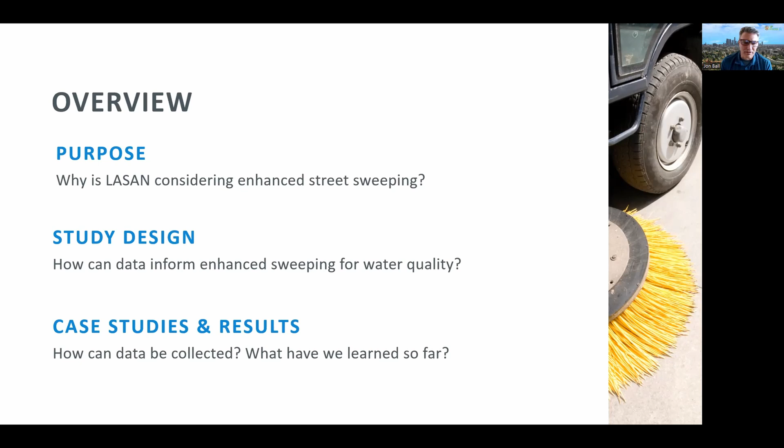Ryan will also talk about other case studies and some specific results that we've gotten from our first phase of testing that we've completed, and kind of where we're going to go from there. Next slide. Okay, just a little more background on the City of Los Angeles and specifically the Bureau of Sanitation. So I work for LA Sanitation, and sanitation is primarily focused on wastewater treatment, watershed protection, which is the group that I work in, which is stormwater management, and then also managing our solid resources or our trash.

There's also a lot of other work that's done with sustainability. We have a really neat biodiversity program and have a lot of really talented engineers and scientists within our organization. The one thing you don't see on this slide is a street sweeper. Actually, sanitation is not responsible for the street sweeping program in Los Angeles.

Let's see. So the main mission of LA Sanitation is to protect public health and the environment. And the division that I work in is primarily focused on stormwater quality and how that impacts environmental health and public health. Los Angeles is a pretty big city. It covers a large geographical area. There's 4 million residents. Sanitation is a big organization in itself; we have 25 separate divisions. They kind of fall under those main categories of wastewater, stormwater, and solid resources. We have over 3,000 employees.

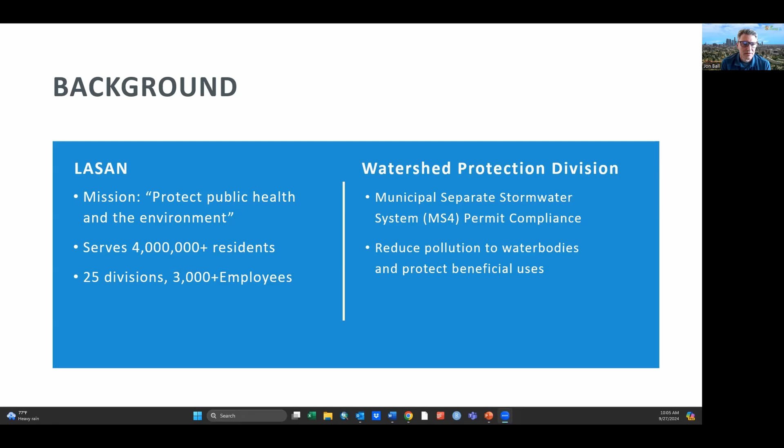And the group that I work in, Watershed Protection, we are mainly focused on compliance with our MS4 stormwater permit. And we're looking at ways to reduce pollution to our local water bodies and protecting our beneficial uses. So if sanitation doesn't oversee street sweeping, why are we interested in that? Well, we have some challenges in terms of water quality. That's going to be inherent when you have 4 million people living in a region.

And we'll get into some more specifics on this, but there's a lot of efforts that are going on to improve water quality. A lot of it has been focused on infrastructure projects that capture and treat stormwater. But those can be pretty expensive, as other presenters were discussing in the previous seminar. So we see street sweeping as an opportunity. We can get at pollutants before they enter our MS4 system. And I've been told, and I believe this, that it's a cost-effective alternative to structural BMPs.

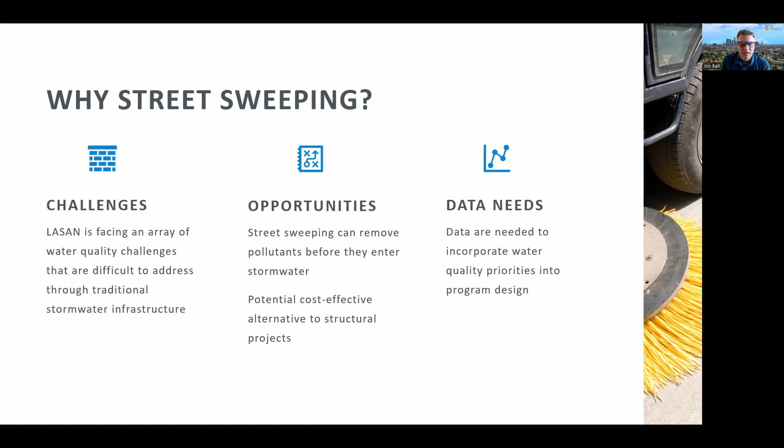So in order to maximize the benefits of street sweeping in terms of water quality, we've realized we need to collect some data on this and kind of test for ourselves in our local area. How can we make improvements to our existing street sweeping program? And that's what we're going to talk about today. So here's a listing of some of the water quality challenges that we have in the City of Los Angeles. And actually, these are not just specific to the City of LA. There's many other municipalities that are represented in this map.

This shows about four of the major watersheds that the city of Los Angeles is located in. The one in pink is the Los Angeles River, our largest watershed. The one in blue is Ballona Creek. The one in yellow is the Dominguez Channel, which drains to the LA Harbor. And green represents the local creeks and storm drains that discharge to Santa Monica Bay.

So we have TMDLs established in all of these watersheds. Bacteria is ubiquitous throughout. Metals, including copper, lead, and zinc, are included in all of these. Santa Monica Bay might be an exception, but we do detect metals in the runoff to Santa Monica Bay. Trash is a problem region-wide, and there's a trash TMDL in place. We also have legacy organics like PCBs and DDTs, and even though those haven't been used for decades, we still detect these compounds in our runoff samples.

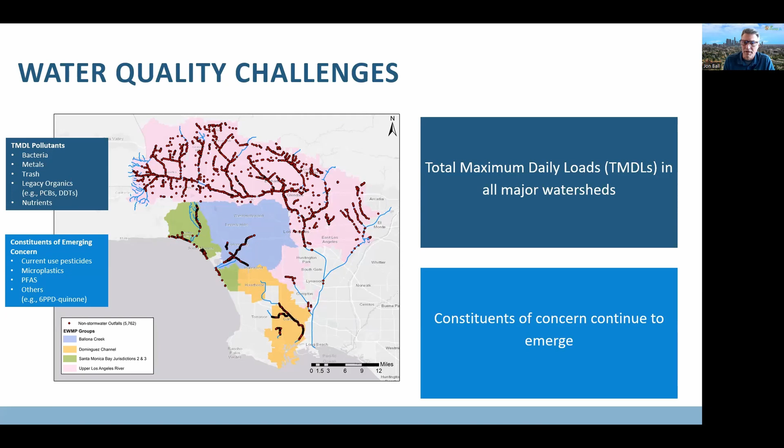So we do have these watershed management programs that are in place. These were incentivized by our MS4 permit. For each watershed that I just showed you, we have a watershed management program. Basically, these are a roadmap for how we can attain the water quality requirements that are required of us. And the end goal is to protect those beneficial uses, such as recreation and freshwater and saltwater habitat.

So how do these watershed management programs work? Well, they determine how much stormwater must be captured and treated - so how much capacity or volume of stormwater needs to be treated. It identifies the BMPs and the locations where they're needed. There's an optimization algorithm that's run through modeling, and it finds the most cost-effective BMPs. In the end, it provides basically a recipe or a list of BMPs that are needed.

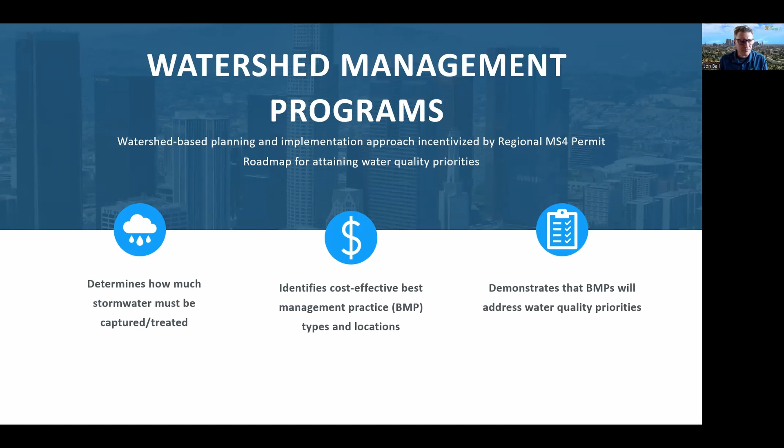Part of this program is also demonstrating to our Regional Water Quality Control Board that this recipe of BMPs will indeed result in the water quality that needs to be attained. That's also referred to as a reasonable assurance analysis, or RAA.

Okay, so we have some challenges with these watershed management programs. They're significant, and they provided a roadmap. So now we have this roadmap, but there's a lot of hurdles to get over. One of the biggest hurdles is just the capacity needed to treat all this stormwater runoff. So we like the Dodgers here in LA - this graph shows basically the treatment capacity that's needed in each of our major watersheds. We've termed it in terms of Dodger stadiums - how many Dodger stadiums would you have to fill up to treat the necessary amount of stormwater runoff?

You can see Upper LA River, we have nearly 6 Dodger stadiums to fill up with stormwater runoff. So every time it rains, imagine filling up 6 stadiums of water. That's what we're up against. If you take all of the watersheds, that's about 11 stadiums worth of water treatment, and that's just an enormous volume to deal with. So that is definitely one of the biggest challenges, to the point where we wonder if it's possible.

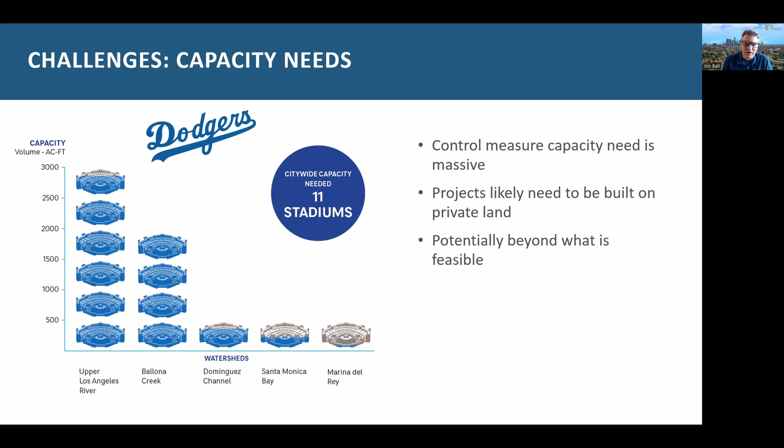Another challenge would be just the cost associated with that. We've made some headway on this, but basically the pie chart on the left shows the total funding that would be needed over a 10-year period is up to about $6.5 billion with a B. And you contrast that with the revenues available to us, which is on the right-hand side - we're looking at $1 billion over a 10-year period.

Now, in our region, in LA County, we just have this new stormwater fee that was passed - it's the Safe Clean Water Program, Measure W, you may have heard of it. That generates a lot of money for us, but you can see we're still only about one-sixth of the way there. So there's a lot of cost associated with meeting water quality.

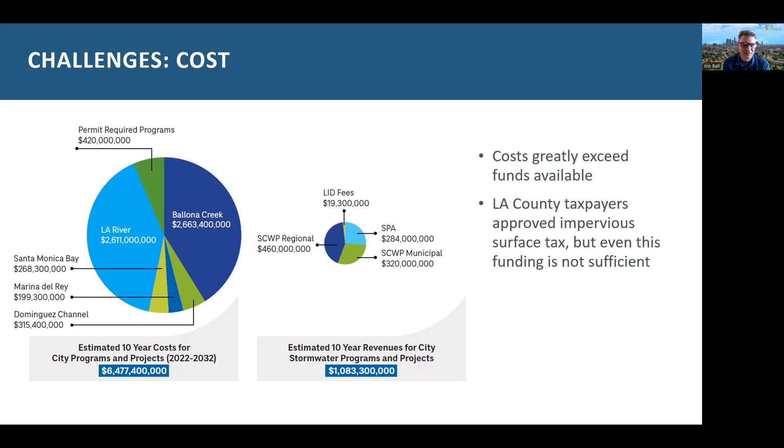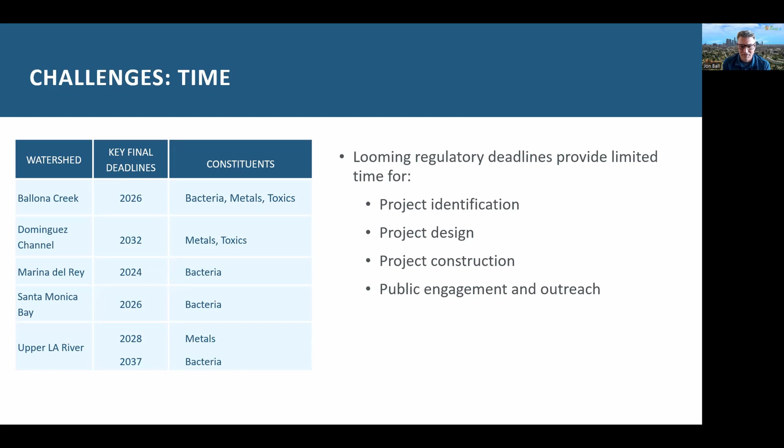Other watersheds are on different schedules, but there really isn't enough time to implement the number of projects. We don't have available funding. So you can see that we definitely have our challenges, and I think that's kind of why we're looking to other solutions to augment the efforts that we're doing right now.

So that is why we're looking at street sweeping. How can street sweeping improve water quality?

We know that the material on streets, also known as street dirt, does contain a variety of pollutants. Some of this comes from vehicle emissions and wear products. I've learned over the years that tires have a lot of zinc in them, and brake pads, at least traditionally, have had copper in them. In California, there's a brake pad initiative that was passed, so we are reformulating our brake pads in California. I'm not sure what the rest of the country is doing about that. We're hoping that will be effective, but regardless, we know that there's just a lot of pollutants that end up on the streets.

Even the street material itself, the roadbed material, contains heavy metals and PAHs. And then, as people fertilize their lawns or parks, use pesticides, there's pet waste that ends up on the streets. In the end, street dirt contains all this stuff. And we know that if we can control street dirt better, then we can improve water quality.

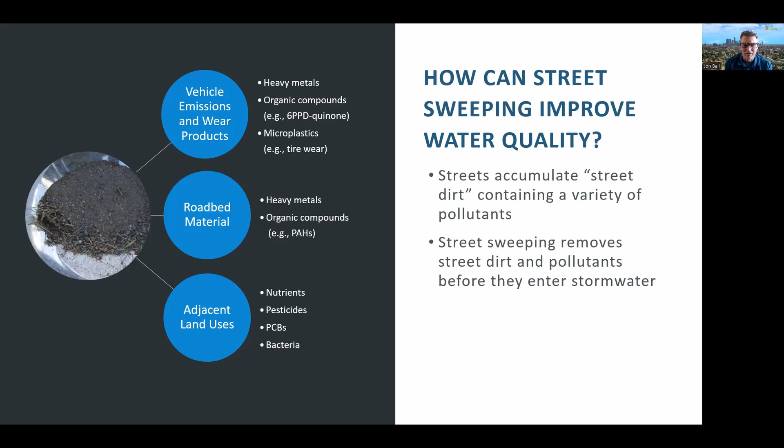This was discussed a lot in the previous presentations, and I'm still learning about street sweeping, I'll be the first to admit that. But some of the things I've learned already is that there's a lot of advantages to using street sweeping as a way of controlling pollution.

One of the major things is that it's highly cost effective relative to traditional structural stormwater BMPs. And I've seen this firsthand because City of LA has put in a lot of stormwater projects, and operation and maintenance in particular has always been a challenge. I know street sweeping also has requirements for operating and maintaining the fleets, but I feel like we already have a pretty good handle on that.

Structural BMPs also take a long time to get in the ground. There's a lot of permitting, there's the design process, the construction. You always run into things you didn't anticipate with a large structural BMP project.

Street sweeping also just makes your city look cleaner, and that's one of the main reasons it's done in the city of Los Angeles. What we're trying to get across to people in our own organization is that street sweeping can also be a really effective way of removing pollutants. So those are the advantages.

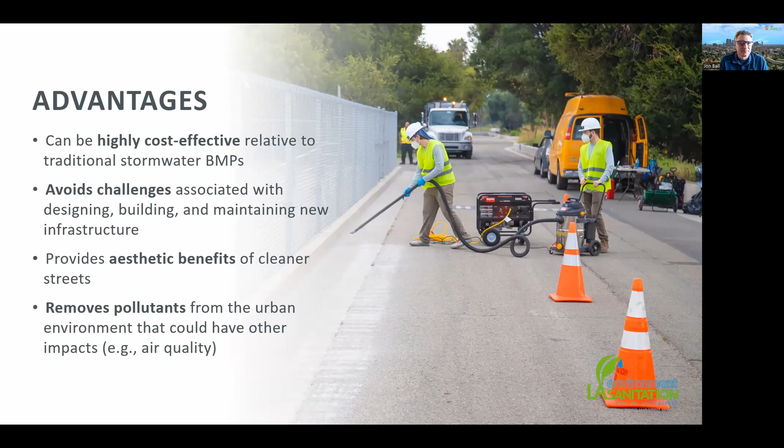So how do we currently sweep? Street sweeping is a requirement of our MS4 permit. Like I mentioned, LA Sanitation is not involved directly in street sweeping, it's covered by our Bureau of Street Services, and there's over 4,700 curb miles that are swept biweekly. I would say that the primary focus is really on the stuff that you can see, the trash and debris that we can see with the eye.

But what is less obvious is the street dirt, and you don't always think of it in these terms, but street dirt is probably where most of the stormwater pollutants are associated with, and those are really what we need to focus on if we're going to think about improving water quality.

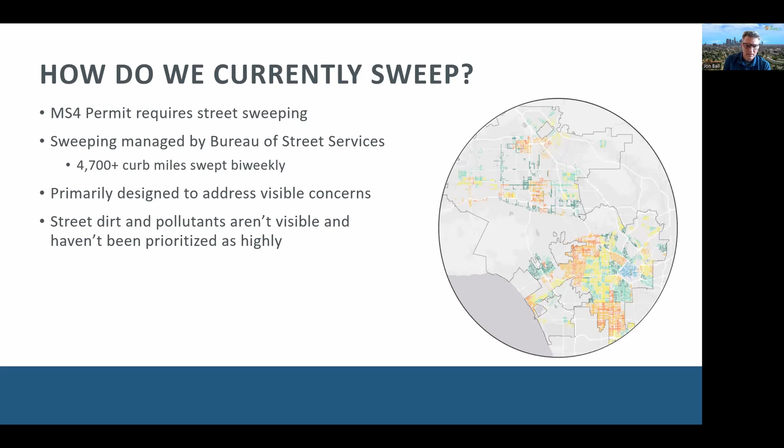That gets into our study, and there's three main things that we're asking. How should we be sweeping? That includes what are the best technologies and approaches to street sweeping. Ryan will talk about some of the comparison testing that we did with the broom sweepers and the regenerative air sweepers.

The other thing we're looking at in our study is where street dirt accumulates - where should we be sweeping and putting most of our effort in? And then, of course, when should we sweep? What are the critical times of the year? Should we put more effort before the storm season? And how frequently should we be sweeping in these areas? That's what our study is examining. And with that, I'm going to hand it over to Ryan.

Thanks, John. That was a great overview of some of the challenges that the city is facing. We provide a lot of support to the city on all those different TMDLs that John was mentioning at LWA. And we also have some experience doing street sweeping studies for other municipalities in Southern California. So when John came to us with interest in this topic, we were happy to support.

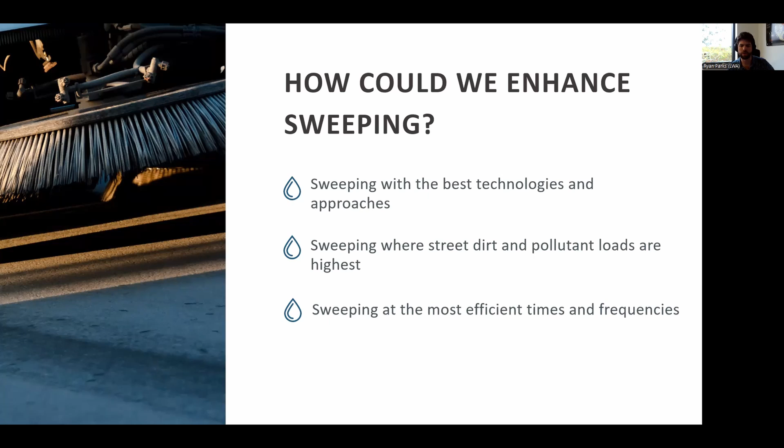I'm going to talk a little more about what the study looks like, what we've drawn up, what we've started to collect in terms of data. As John summarized, we've designed our study around three questions, with the aim of informing specific outcomes or areas where enhancement could occur. So telling us how we could sweep more effectively, which sweeper should we be using and procuring, how should we be operating the sweepers in terms of speed, and where to sweep, so understanding how pollutants are accumulating throughout the city.

The city, as John mentioned, is very large. There's a lot of differences in the topography, land use, both current and historic. So all of that is potentially driving where you could get the most bang for your buck in terms of, if we're going to enhance sweeping, maybe we should target these areas first. Then there's when to sweep, like John mentioned, really looking at sweeping frequency. Where do you start getting diminishing returns? And then also the seasonality - we have a Mediterranean climate here, so looking at sweeping during the wet season versus that period right before the wet season, right around now. How can we potentially use sweeping around some of those factors to yield the greatest benefit with our limited resources?

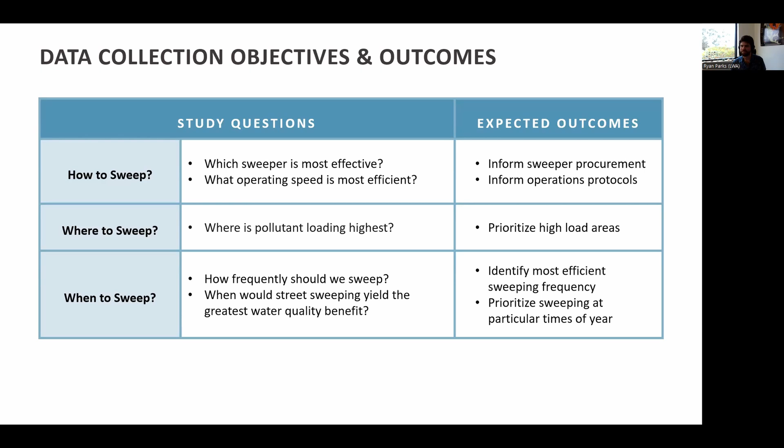So where was I? Basically, how is LASAN answering those questions? We're going to talk about three different types of monitoring, and if you were on that presentation earlier, these are the same terms that Roger was using. Some of this stuff is complete, some of this stuff is planned. First, what we've done so far is controlled environment pickup performance monitoring - evaluating sweepers in controlled conditions where you can isolate variables and really get at those differences between the sweepers and their different operating conditions.

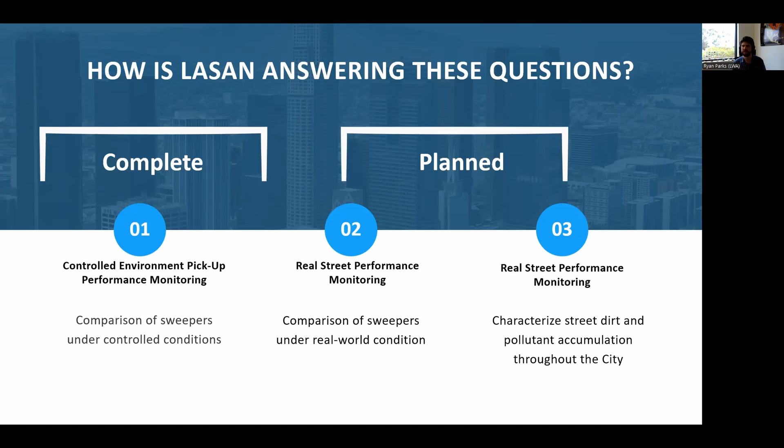It's the impervious surface tax funded stormwater funding, the vehicle that LA has developed in the last 5 to 10 years.

I'm also going to talk about another study that we did that LWA was a part of for the cities of Burbank and Glendale. Roger, who presented previously, also worked with us on this project and was a big help in implementing it.

I'm bringing it up to provide another set of data, particularly in some of the areas where we haven't collected data yet, as an example of the kind of data we will be collecting and some of the results that come out of that.

This was a study done in 2012 as part of a TMDL implementation plan that was really looking at, one, trying to understand the benefits of those two cities' current street sweeping programs in terms of pollutant removal, specifically metals, doing some controlled environment testing of potential new sweepers to see what they could achieve, and then going out and actually piloting those sweepers on real streets within those two cities to see what benefit they could get and how that could fit into their overall compliance strategy for the metals TMDL they were dealing with.

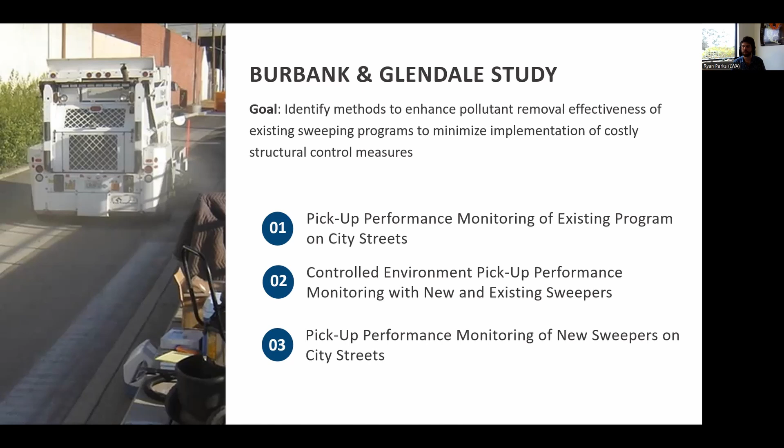So now I'm going to get into what this kind of monitoring looks like - what kind of data can you generate, and what are some things we're learning by collecting that data?

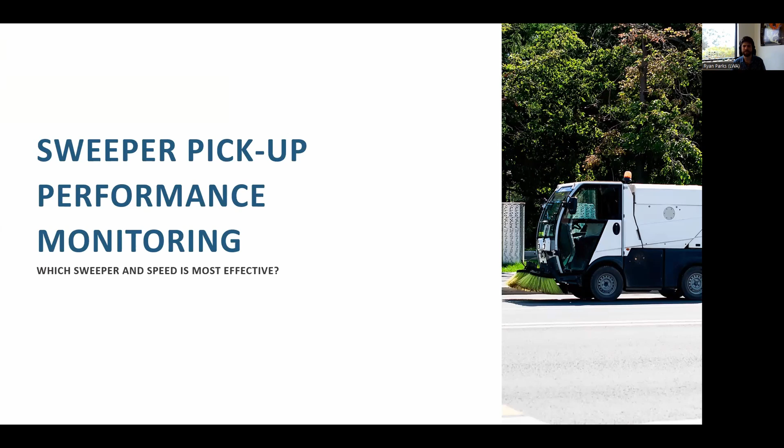Starting with the sweeper pickup performance monitoring, specifically looking at sweeper type and sweeper speed - like I mentioned on the previous slide, you can do that in a controlled environment or on real streets. I'm going to start with the controlled environment testing that we've done.

What that looks like is you basically find a simulated track with a good curb where you can test the sweeper in controlled conditions, away from traffic and away from all the different variables that could be out there in the urban environment.

It allows you to measure pickup efficiency a lot more precisely. You put down a known amount of simulated street dirt, measure how much is left on the street, and so you get a much more precise estimate of what that pickup looks like. It also allows you to isolate all your variables.

You can obviously look at different sweeper types, and you can control the speed really easily. You can also vary things like the loading of the street dirt and the texture of the street on which you're doing the testing.

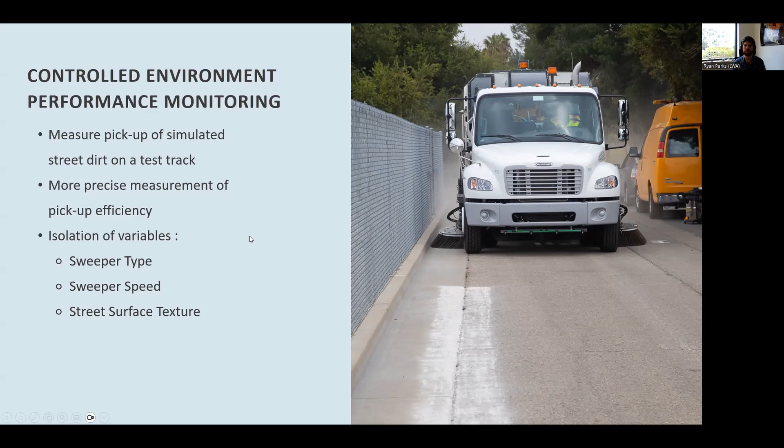So what we looked at were two sweepers. Currently the city of LA's street services sweeps almost entirely with mechanical sweepers, the Elgin Broom Bear. Roger talked a little about how these sweepers work, but basically it's a mechanical broom sweeper using brushes to push debris onto a conveyor belt essentially.

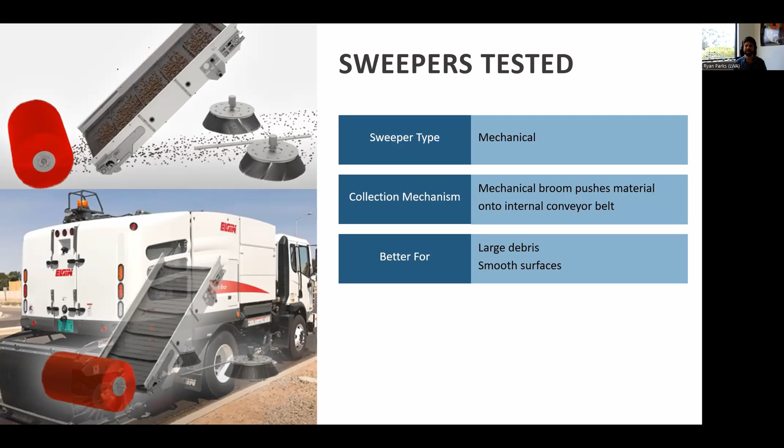That can work pretty well when you have larger debris - here we deal with palm fronds, things like that. You could also imagine that it performs better on smooth surfaces, since those brushes aren't as able to get into the cracks and crevices of a rough street where pollutants and street dirt accumulate.

The other sweeper type we looked at was the regenerative air - the Elgin Regen X, the Crosswind, but same concept. You still have brooms, but that's mostly just to concentrate the material on the street and get it away from the curb, and then you have a regenerative air loop that's blowing that debris off the street into a vacuum pickup head, then regenerating.

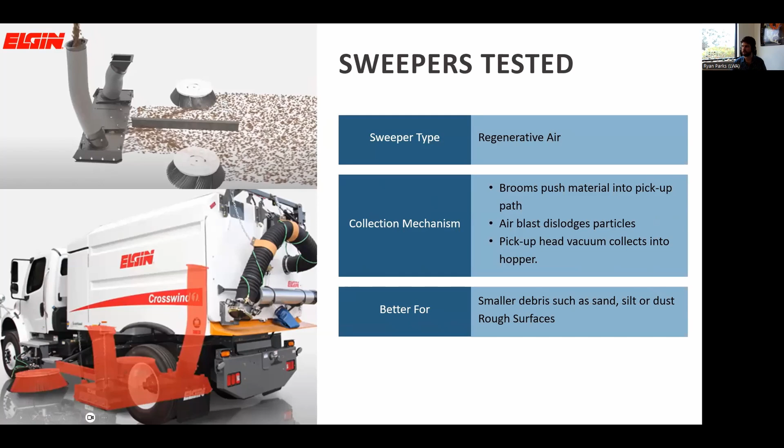That can be a lot better for smaller debris - sand, silt, dust, street dirt - and on a rougher surface you could potentially get more removal by getting into those cracks and crevices a little more effectively, at least in theory. So those are the sweepers we tested.

In terms of the simulated street dirt - what is that? You can't just go to the store and buy simulated street dirt. So what we did was procure a variety of silica sand and clay products in different particle sizes so that we could get a recipe as close as we could to the range of real street dirt, based on data available from studies done in the Southern California area.

The other thing is that silica has a similar specific gravity to real street dirt, so as whatever that pickup mechanism is - the brooms, the regenerative air - comes through, that street dirt will respond similarly to those forces.

It's a fairly involved process. You've got to procure all the different components, mix them in a cement mixer, and weigh them out for your different trials. But it provides a really good proxy for that real street dirt.

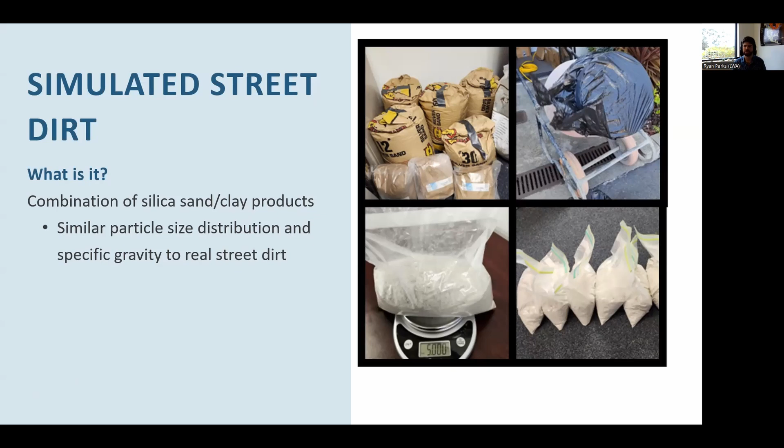For the testing, we did this at a city water reclamation plant. This is a great location for this type of work because it's city owned, so access wasn't an issue, and there's minimal traffic in the area. You've also got curbs, which are essential to effective street sweeper performance, as Roger emphasized in the previous presentation.

At this specific location, conveniently there were two streets we identified, with kind of two sides. One had been recently resurfaced and the other was a bit older, so that allowed us to do some testing on street surface type—not just an immaculate, smooth piece of pavement, but also a rougher, aged street that might be more indicative of some areas out there in the real world.

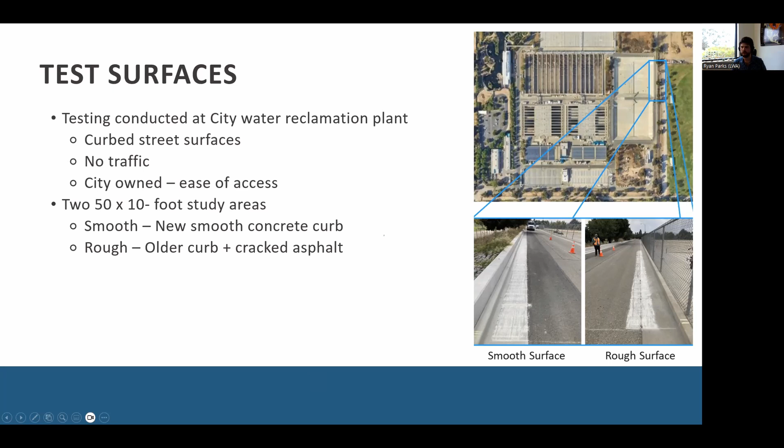Those were 50 by 10 foot study areas. I'll talk about that on the next slide. So what does that testing actually look like?

First, we went through the test track with the sweeper being tested, doing multiple passes to make sure it's starting from a clean state. This also gives you an opportunity to get the street sweeper dialed in, in terms of broom placement and speed. We then go through with an industrial shop vac—stainless steel to avoid contamination—with a filter inside to make sure you don't lose that really fine material, doing another pass before anything else just to make sure we're starting from zero.

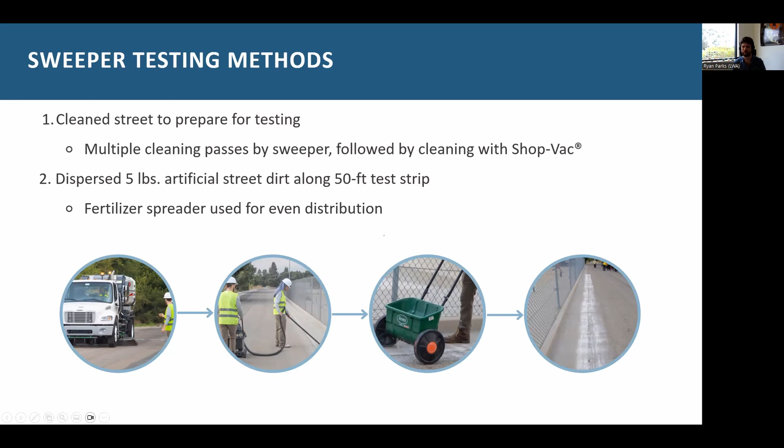Once the test track is super clean, we used a fertilizer spreader to disperse 5 pounds of that simulated street dirt along the track. That amount was selected based on data from other studies on what's a reasonable amount of street dirt to expect on an urban street. After applying it, you can see the silica is white, so it's really easy to see where it is and make sure you're getting all of it during the post-sweeping pickup, which I'll talk about more.

Once you have your street dirt out, you can then test whatever trial you want—different combinations of sweepers and speeds. Once the sweeper's gone through, you go back through with that shop vac and collect what's left on the street, very carefully watching the speed at which you're moving the nozzle to make sure you're getting everything.

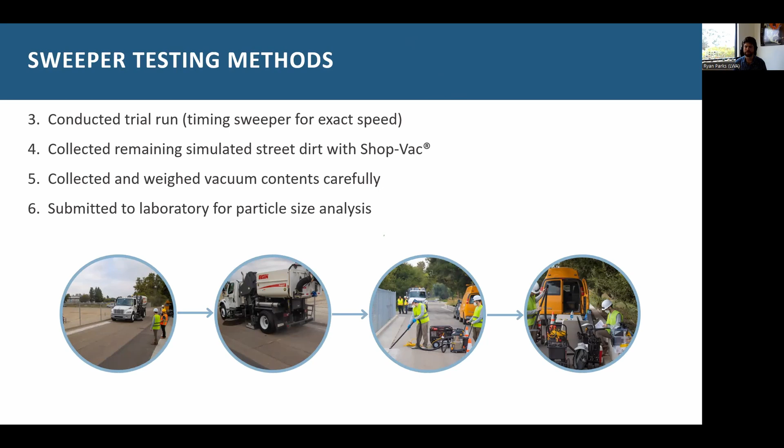Then very carefully, you take that material from the drum of the shop vac and decant it into sample containers, which we submitted to the lab for particle size analysis.

Through that process, we tested about 10 different trials—both sweepers on the two different surface test tracks, and a range of speeds from 5 to 15 miles per hour. 5 being the manufacturer-recommended speed, and 10 and 15 miles per hour being the upper end of what operators might actually do in the field under certain situations.

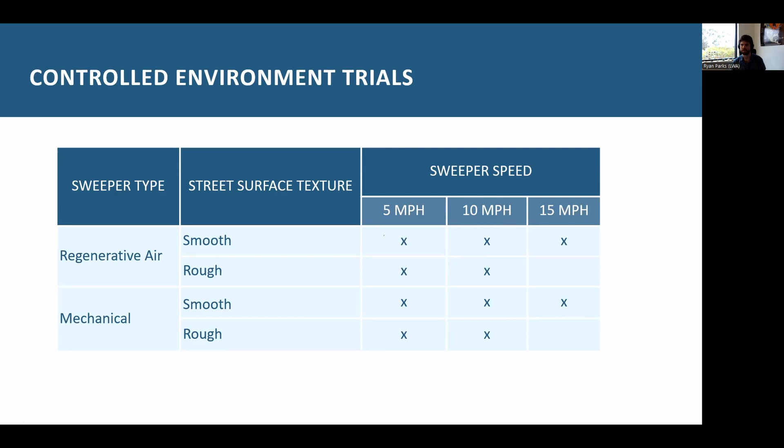So what did we find? At a high level, looking at gross street dirt pickup, there was a very clear difference between the regenerative air and the mechanical sweepers. On the smooth surface, unsurprisingly in both cases, we were able to pick up a lot more of that street dirt. The regenerative air was about 80%, and the mechanical was down around 50%, a little under that.

The rough surface generally showed less pickup, but one thing that was really interesting was that the difference was less pronounced for the regenerative air sweeper. The mechanical sweeper's performance dropped by about half, maybe a bit more, whereas the regenerative air only dropped from 80% to 70%—showing a greater ability to get into those cracks in the pavement and pull that material out into the hopper.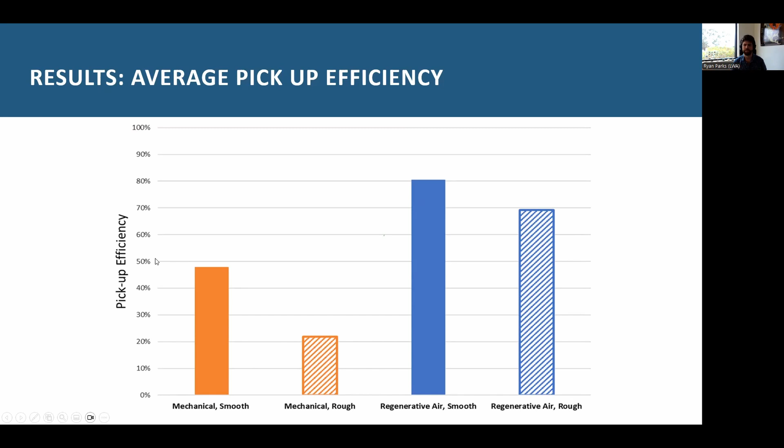And then in both cases, even if you're sweeping using a regenerative air sweeper on a pretty chunky street, you're still getting a lot more performance than the mechanical would on kind of the ideal conditions, a smooth street.

So another thing we looked at was sweeper speed. We've got the regenerative air in blue and the mechanical in orange, and the solid and dashed lines indicate smooth and rough street surfaces. Barring a little bit of anomaly with the mechanical on smooth, you did see a decline as expected in performance as speed increased.

What was interesting is that the regenerative air, regardless of how fast you ran it, and regardless of the street type actually too, performed better than the best performance that we saw with the mechanical, which suggests that if you wanted to, you could potentially run your sweeper faster, get more mileage covered per hour of operator time, and get a lot more pollutant removal. Or you could go more slowly and really maximize your pollutant removal. Either way, you're getting a lot more performance than you would under a scenario where you're only using those mechanical sweepers.

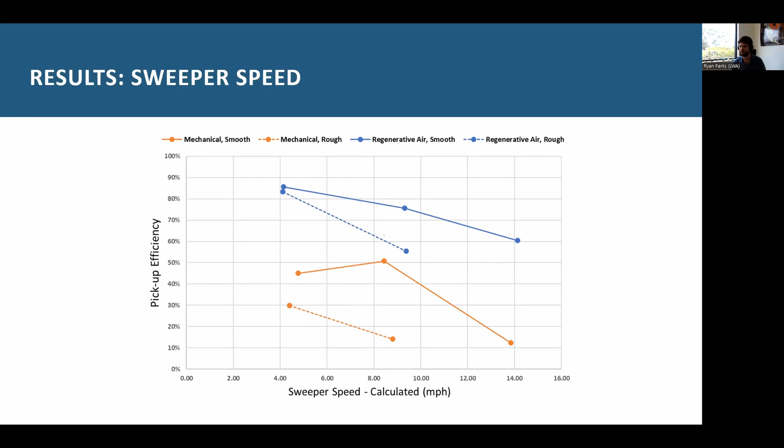So we didn't just look at street dirt as a whole. We looked at that particle size distribution. That's really important because your pollutants typically aren't distributed evenly in that street dirt, which ranges from really, really fine clay and silt particles up to essentially sand, gravel, larger material. Most of the pollutants we care about, metals, a lot of the organics, tend to be most concentrated in those finer particles, in the very small to 250 microns, typically where you see greater concentrations.

And so a sweeper that's able to pick up those fines is really what you need if your goal is to remove pollutants. When we tested the sweepers, again, the blue is the regenerative air, orange is the mechanical. These results are just on the rough surface track for demonstration purposes. What we saw, looking at those big particles, the almost gravel sized, the regenerative air was better, but the difference wasn't huge. They're fairly close together, but as you got down to finer and finer particle sizes, that gap continued to grow.

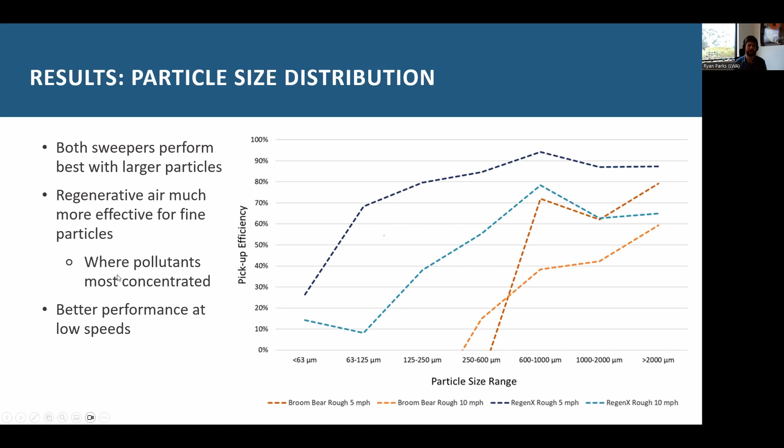So what this result really tells us is that the graph I just showed, the difference in sweeper performance from an overall street dirt removal standpoint, that difference is going to be even more pronounced when you look at the pollutants themselves, because that difference in overall performance seems to be driven by the sweeper's ability to pick up those fine particles.

And like I mentioned, the Burbank and Glendale study also did some controlled environment sweeper testing. I'm not going to get super into the trials and the variables they tested, but suffice it to say that they found similar results. Much better performance with regenerative air and vacuum, up into the 80% pickup efficiency range, consistent with what we found. And with the mechanical, they had some results that were a little bit higher, but definitely lower than what they saw with the regenerative air and vacuum, 50-60% pickup efficiency.

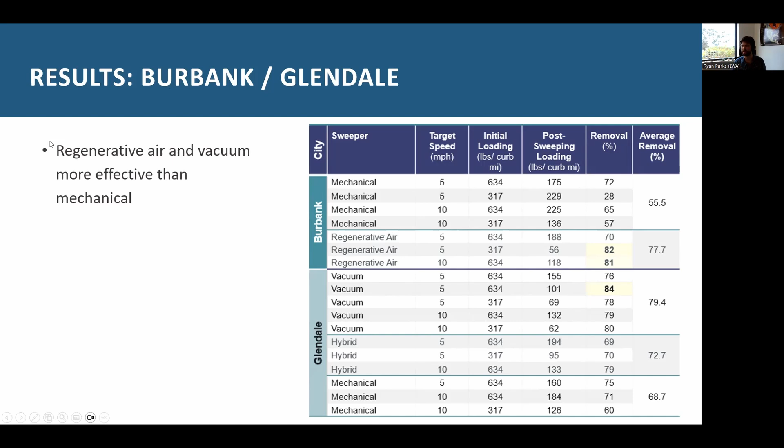And so I've made some of these points, but really, when you look at regenerative air and vacuum sweepers, you're going to get a lot more street dirt removal than mechanical sweepers. And because that difference is strongest with respect to those fine particles, you're going to get a lot more pollutant removal by using these sweepers. And that could translate, and I'll talk a little bit more about putting this in context in terms of pollutant removal, on the order of 2 to 6 times more in terms of metals removal.

And then in addition to that, you've got the difference in performance on rough streets. So the regenerative air sweepers are going to be more effective on a greater percentage of your streets. Roger talked about the importance of maintaining pavement condition. That might not always be possible. So having a sweeper that can perform well throughout your street network is really important.

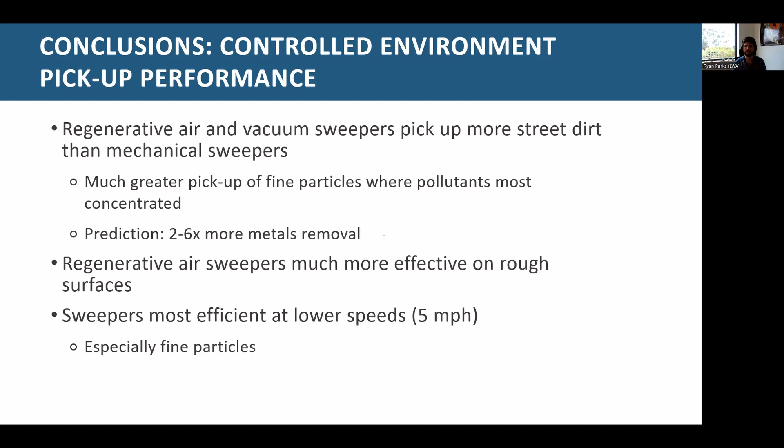And then basically observing that the manufacturer recommendation for lower speeds, that holds, especially for those fine particles. So making sure you're operating your sweepers at appropriate speed is important. So that's controlled environment testing.

Another way of looking at this is on real streets, where you can kind of test under those real conditions that sweepers will be exposed to, the surface textures that are out there, real street dirt, so not using that simulant, and then also dealing with the effects of you've got trash, you've got debris, you've got different things that are going to impact sweep performance.

By doing real street pickup performance monitoring, you're also able to actually test in terms of the pollutants. You don't have to make that extrapolation from particle size of the simulated street dirt to what a pollutant would be doing. You can actually measure the pollutants. And it allows you an opportunity to field verify what you saw in those controlled environment tests, to provide additional information to support these decisions around what sweepers we're using.

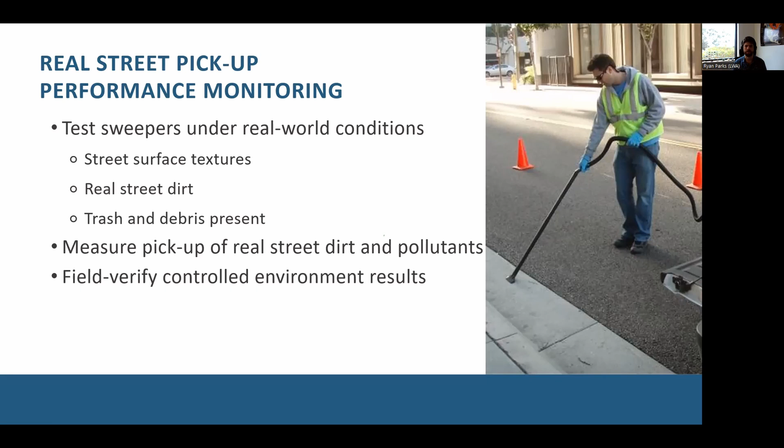So for the LASAN study, over the next couple of years, we're going to be doing testing of 3 approaches. We're looking at the mechanical sweeper again, the current sweeper, a regenerative air, and we're also going to look at tandem sweeping, where you run a regenerative air behind a mechanical sweeper to see what the benefit of that would be, whether that would be a cost-effective option, if we're not able to completely swap out mechanical. I mean, there's some benefits to mechanical sweepers. So an option might be to use those regenerative air sweepers in high priority, high pollutant areas.

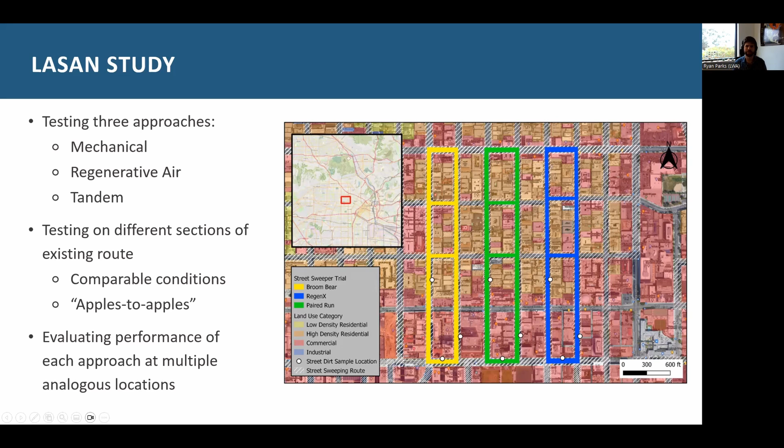We're going to go out on an existing route where we can find 3 sections that offer comparable conditions, so we can get a real apples to apples comparison of these different sweepers. And then within those test sections, we can go out and evaluate the performance at multiple locations to get a representative sample of how the sweepers are performing.

So what does this testing methodology look like? It's really similar to the controlled environment in terms of you're collecting the street dirt before, you're collecting the street dirt after, how much pollutants, how much material was there before, how much there was after, and then calculating the difference. And that's what went up into your sweeper.

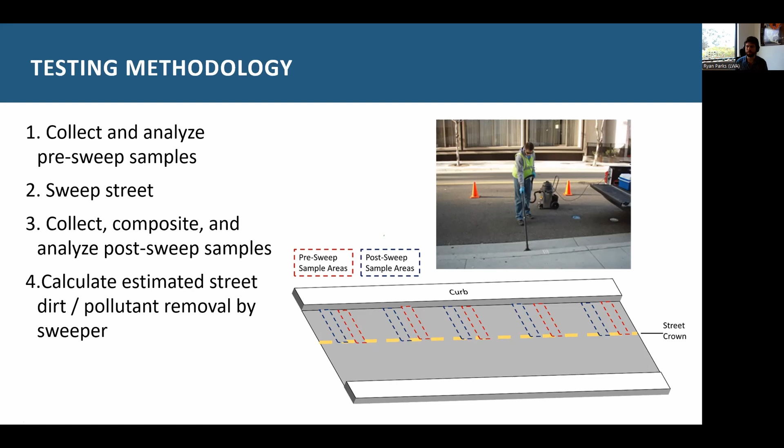On your identified street segment, you identify through a random selection process your pre-sweep areas. You mark those so you don't sample them again when you do your post-sweep sampling. And you're basically taking that shop vac and going from the curb to the crown and getting all the material that's there, and then compositing that for multiple locations along that street segment, because there is going to be a lot of variability in terms of how pollutants accumulate.

And so we don't have data to share yet on that, but Burbank and Glendale did look at this, both looking at their existing program, which was primarily mechanical sweepers. When they went out and measured the performance of that program, they were getting somewhere in the negative 10 to 25% street dirt removal. You do have some negative numbers because there's still a lot of variability out there in terms of, was a car parked over that spot all week? There's just a lot of variability, which is why you do the controlled environment testing. But in general, you did see street dirt removal.

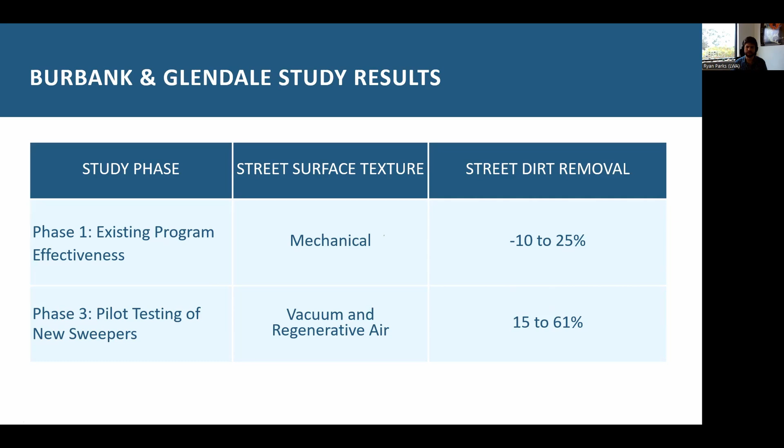When they went out and piloted the new sweepers, generally, the numbers went up. You got more street dirt removal as expected. But again, there was quite a bit of variability, and in designing our real street testing, we're trying to control for those factors, trying to find really similar locations, similar conditions, similar street surface textures, doing the testing on the same day. So you can try to control for those factors and minimize that noise so you can better detect that difference in the sweepers. So that's how you can look at different sweepers in terms of their performance.

Got about 10 minutes left, so I'll try to get through this quickly.

Street dirt accumulation monitoring. This is where you're going out and trying to understand the dynamics of the street dirt itself, where and how are pollutants accumulating.

We're approaching this with three types of sampling in mind, each getting at different monitoring questions. What we're calling general characterization is basically going out across the city's watersheds and collecting samples that can be tied to a land use, tied to a street size, arterials versus side streets, different watersheds. Different areas of the city have different industrial histories, current land uses, various socioeconomic factors. And through that data, we want to be able to understand where those pollutant loadings are highest, where we should be prioritizing if we're going to invest in different sweepers, more frequent sweeping, those kinds of things.

Accumulation monitoring, I guess that's a little bit redundant, but it's really focused on the accumulation rates. So not just going out there at one point in time, but going to a site over multiple times to really get at the question of how often to sweep. Currently the city has a lot of biweekly sweeping. So looking at different periods, if we did one week, has that street dirt accumulated enough that it would be efficient to go out there and sweep it? How much would you be able to get from that? Are there diminishing returns? And then seasonal, what's the value of sweeping at different times of year?

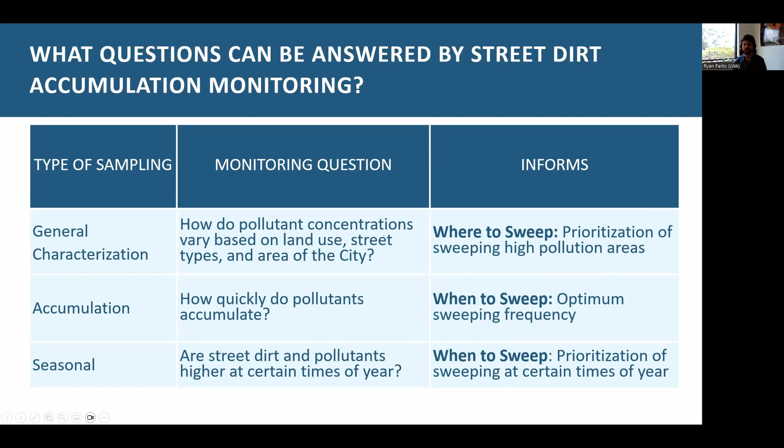So I talked about this a lot, but basically, general characterization puts emphasis on the number of locations and the number of factors that we're representing. The sample collection approach is similar to that real street testing. You're basically just doing a pre-sweep sample. And we're doing that on swept streets so that we know how long that accumulation has been happening. You can compare sites with similar accumulation periods.

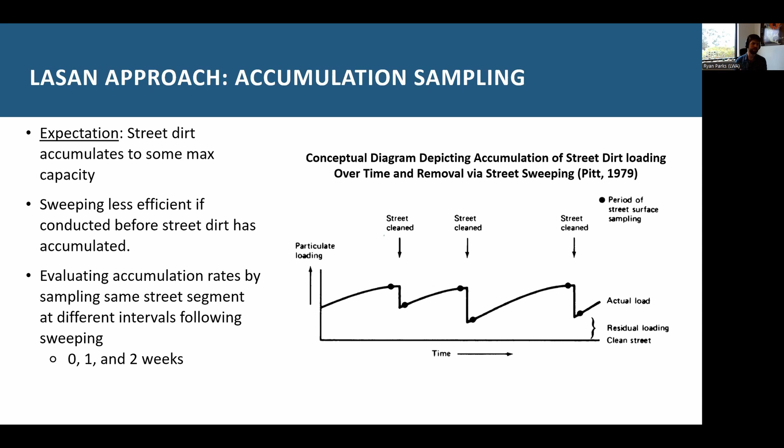In terms of monitoring the accumulation rate, this conceptual diagram illustrates a phenomenon that's been observed with street dirt, where street dirt can't just accumulate infinitely on streets. There's some maximum balancing of the amount of storage that's available on the street and factors like turbulence from cars, wind. You reach some equilibrium where you don't get any more material on the street, and so by sweeping close to that asymptote, that peak, you can maximize your efficiency. So we're trying to understand what that accumulation curve looks like in different areas, and specifically, what's the difference between sweeping at one week versus two weeks?

And then seasonal, it's really around this wet-dry difference that really underlies everything that we do in the city of LA in terms of managing stormwater. So what is the value of sweeping? Should we send sweepers out in prioritized areas during the month before the storm? And then what is the value of going between storms? Where are we going to get the most benefit? And so that's accumulation monitoring on a select number of sites at different times of year to understand that variable a little bit better.

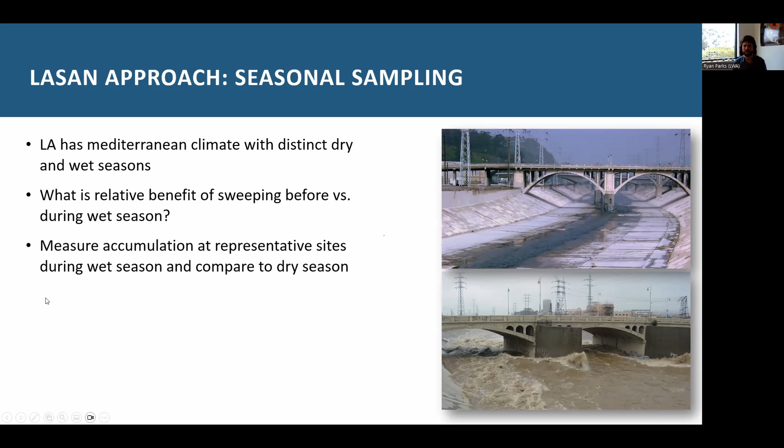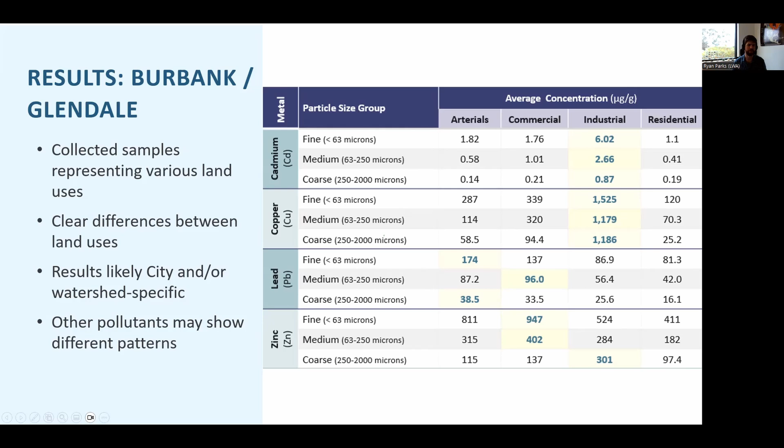The sweeper testing is a little less municipality specific. At this point, it's pretty established that these regenerative air sweepers are going to get you a lot more benefit, but understanding how pollutants accumulate is going to be regional, local in terms of the factors driving those pollutants, the different sources, and how they're distributed throughout your municipality. And in terms of other pollutants, we've got a lot of data on metals, but there are a lot of other pollutants out there that we're dealing with or will be dealing with. So understanding those is really important.

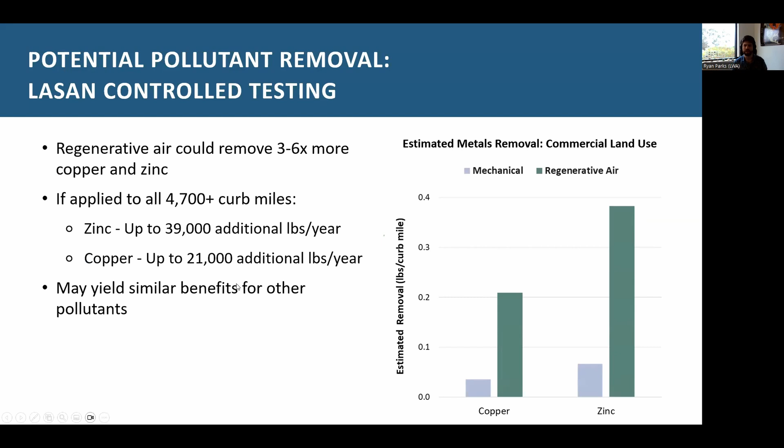We'll go through these slides pretty quickly, but basically reiterating the point and trying to put this in context, you can greatly increase the amount of copper and zinc that you remove by using regenerative air versus mechanical sweeping. If you apply that to all 4,700-plus curb miles biweekly, it translates to a lot of additional metals removed and potentially similar benefits for other pollutants.

Burbank and Glendale, the numbers are in the same ballpark with respect to street dirt removal, sediment, and metals basically telling you the same thing. There's a lot of potential to improve.

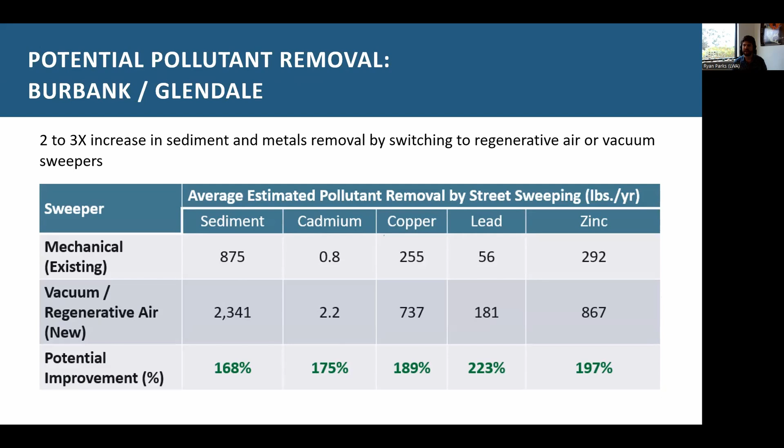Well, thank you, Ryan. I think the take home for me from all this is that controlling and picking up street dirt can be an effective way of improving water quality. If we find better ways of picking up street dirt, we'll get better water quality. That's what the city of LA is trying to learn. There's other things that go into a street sweeping program, but our focus is really on the water quality aspect. I think there's a lot of opportunity there. With that, I think we can open it up to questions.

Most of the testing we've done has been controlled environment testing, and we primarily did that without water spray assistance, just for the purpose of being able to test those sweepers quickly without needing to allow the street to dry. But water use does play into the performance to some extent. I think there are newer sweeper technologies that allow you to sweep without having to use as much water. And Roger, if he's still on, might be able to speak to that.